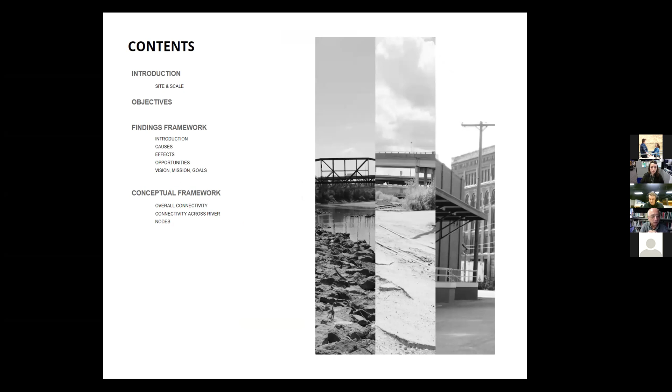For today, we'll start with a brief overview of our overall objectives for Studio and the different site scales we studied. Then we'll go through the main conclusions and findings about our area. Lastly, the Studio will present our conceptual framework and master plan so far for our area of study.

Our area of focus this year is on reimagining the River Valley in the Kansas City area, specifically the area surrounding the Kansas River and Armourdale. Our Studio objectives for the project are to rethink the Kansas River as an integral part of the city identity.

To reconnect the city to the river as a repurposed and extended public realm, and lastly, to enhance the connection between the two cities of Kansas City, Kansas and Kansas City, Missouri, using the river as a catalyst.

Our process for this objective has been through research and analysis, where we conducted an inventory of our site, focused on several conditions of the site, and began to form our conclusions about the area and some possible design solutions. From there, we needed to outline a conceptual framework for the project based on these findings, which resulted in a conceptual master planning framework and its integral parts.

We started by defining the scales that were most important for us to work within, which would give us various scopes of information.

The first scale we look at is the riverfront scale map, and this allowed us to look at all the neighborhoods along the Kansas River, including Armourdale, and determine more about the overall area and how it is used.

Then we moved into our bluff to bluff scale so that we can acknowledge the importance of the River Valley region and understand what topographical challenges we are dealing with.

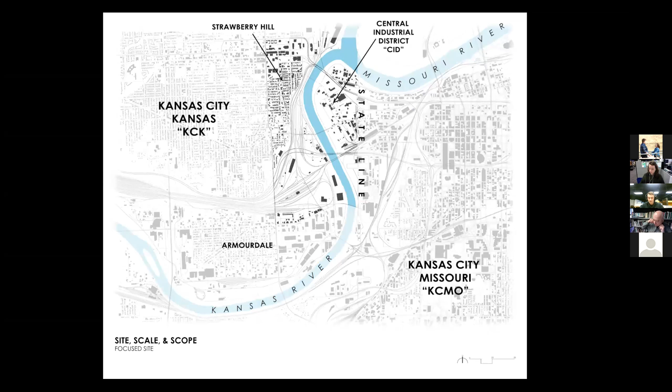And lastly, we have our focus site, mainly looking at the central industrial district as well as the context across the river.

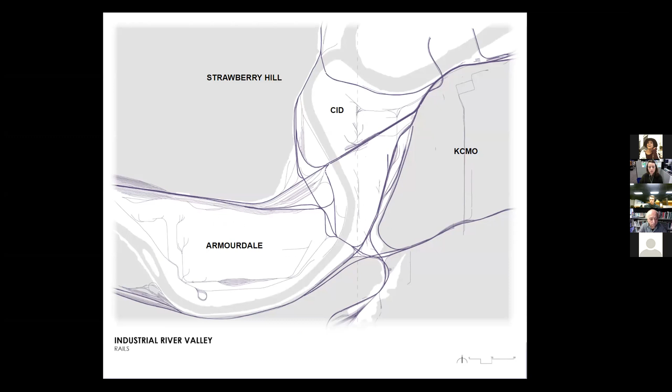The next major cause of the disconnection is the rails and infrastructure. Because of the topography of the area, as well as the river, the flat river valley allowed for implementation of heavy rails and infrastructure, which then over time developed up onto the bluffs as well.

As a result of both the river and infrastructure, the area became industrial in nature. These are all the parcels that are industrial, so pretty much everything surrounding the river.

After looking at these causes, we define the most prominent effects as being elevational division, there being three identities, disconnected and lack of public realm, as well as ecological impact. When looking at these three areas, there's no cohesive fabric to the cities due to history, geology, as well as use.

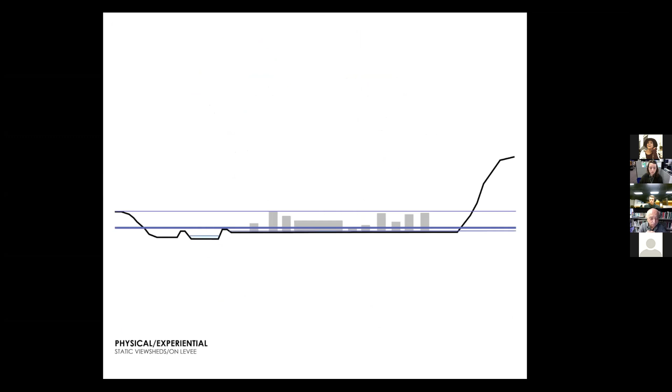In breaking down the first effect, we noted a site experience and elevational division. Because of changing topography throughout the area, the site is experienced in different strata. We began to study these strata and found there were four main layers: in the river, on the levee, on the ground, and then on the bluff.

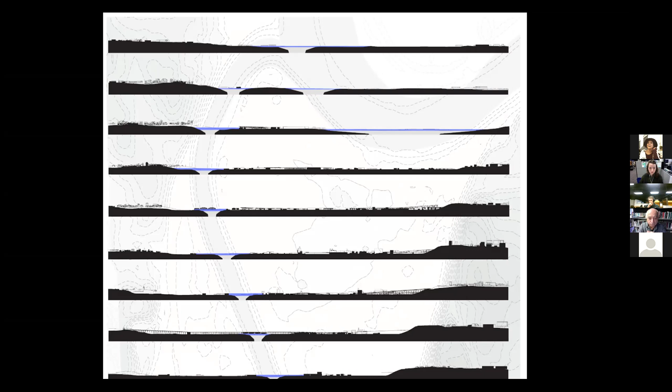We studied the qualities of these layers in plan figure ground and in site section, in relation to disconnected streets, significant spaces, and what you could not see for access from each point. We did this process for each of the four vertical strata lines across the site.

When analyzing dynamic view sheds as you move through the site, we found that objects were more vertical in nature, like billboards and buildings above 2 stories. We also highlight what was appearing in the view along the road most as you drive through. This particular study of Central Ave was just one example.

We did this process for multiple major streets within the site. Ultimately, it showed us that a design must address the infrastructure on our site differently than on the ground level, since it's experienced on a different plane.

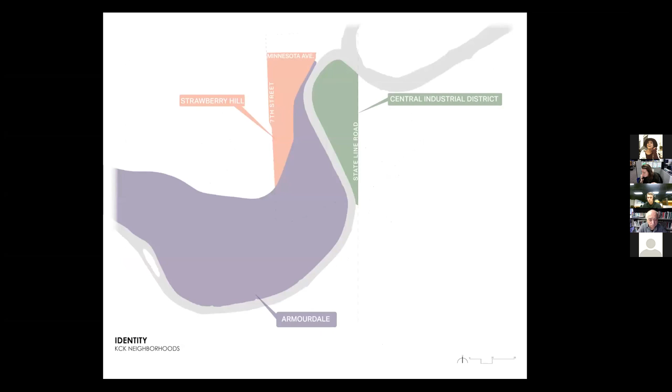The next effect was the city being divided into 3 parts. Here's the breakdown of those 3 areas, and they all have their own sort of identity, which is more clearly broken out on the next slide.

Strawberry Hill is pedestrian scale residential with a regular street grid. CID is spread out industrial buildings at a larger scale with tall infrastructure running over the area. Armourdale is a hybrid of the two.

The organization of the street grid with zoning also affects the east and west connection, with the most walkable connections being in the north and south orientation there in Strawberry Hill and Armourdale.

And the third effect we defined was the river disconnection and lack of public realm. We identified that the public realm has little to no connection to the river, with only 2 public access points and much sparser open green space than the surrounding areas.

And then the last major effects were the ecological impacts. So for one, we're dealing with heavy industrial use, which has created large areas of contaminated land called brownfields. Here's an overview of all the dominant contaminants, which are VOCs, heavy metals, PCBs, and oil.

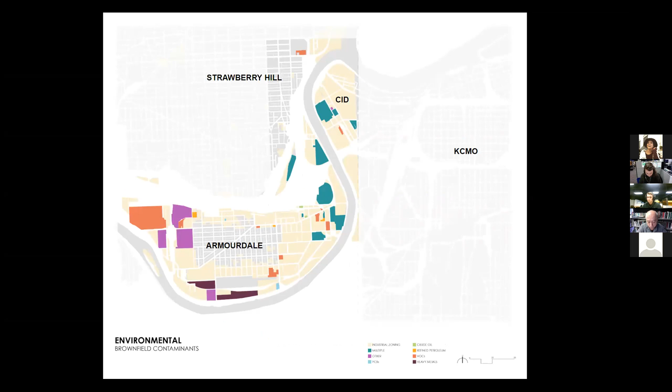And next, we assumed smells and analyzed establishments around the site, breaking them into categories based off potential smells, things like coffee, restaurants, water treatment, newly cut grass, manufacturer, supplier fumes, and highly dusty smells.

And due to the nature of the site in the heavy industrial area, it was important to analyze air pollution in KCK and CID. According to the EPA, particulate matter impacts the site primarily, which is most likely due to those industries around. And then due to the high traffic volumes, both on the streets and the highways, fumes from vehicles, trucks, and trailers produce high amounts of diesel particulate matter that also impact the surrounding neighborhoods.

And overall, air pollution in KCK, Armourdale, and CID was noted by the EPA that the pollutants in these areas do in fact have an impact on the health and wellness of the public. And those closer to these industrial parks are more at risk for cancer.

Also, the EPA listed the following impairments for our section of the river: high levels of E. coli, murky water, high levels of phosphorus, and degraded aquatic life. And these impacts are largely a result of upstream activities, including sewage overflows, sand and gravel mining, and agricultural runoff.

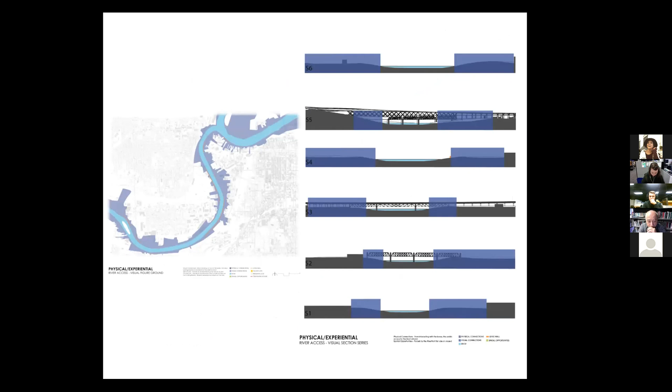And next, this slide shows the visual figure ground of the site, and when you're standing on the levee, what you can see and then what is blocked. And the next one starts to talk about the physical space that is open and not impeded by anything, and you can actually walk on.

And then, as we mentioned in the beginning of the presentation, our site does sit within a floodplain. So the levees that have been created to protect the surrounding communities also create challenges in accessing the water.

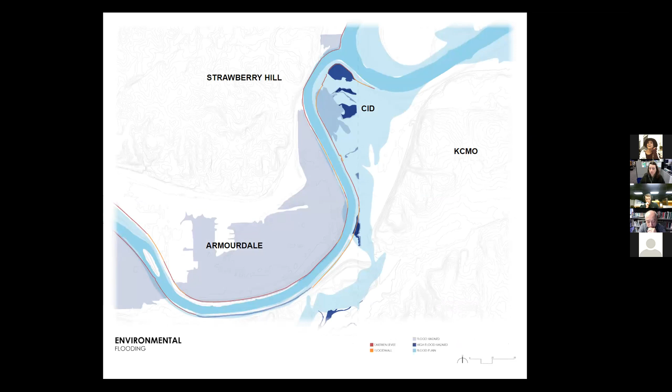And here we just went into a further analysis of the river so that we could see what the challenges are then to creating a more public realm here. And we did pair the hydrograph to compare and show just how quickly that water level can change depending on the day and the season.

And then another finding supporting the potential in this area is that the flow of the water in the Kansas River is better suited for recreation compared to the Missouri River, where it's much faster. As well as the potential in these sites of higher ecological value, which you can see a pretty good size bit there at the base of Armourdale.

Another opportunity we saw is that the site area can be grouped into nodes. So the first node that we classified we call Noodletown, and this area is defined by the immense amount of infrastructure that divides the space and the topographical shift onto that Strawberry Bluff Hill.

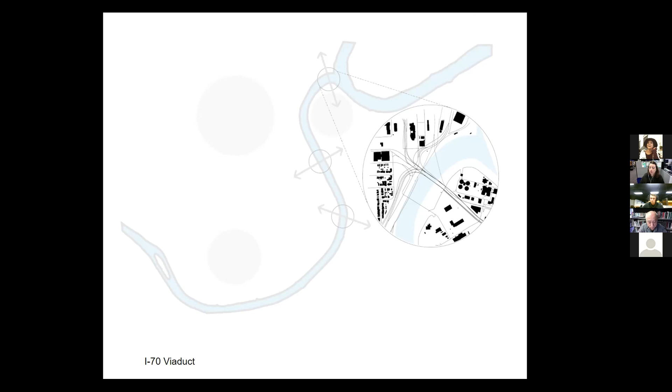As seen in this view shed, the main space defining feature is the I-70 viaduct. And the spatial organization study also starts to show how the streets and the off-ramps of the infrastructure start to create vertical barriers that divide the site.

There are also significant buildings and spaces in the I-70 viaduct and Strawberry Hill area that bring character to the site. These buildings are seen from dynamic moving views on the highway and can be used as wayfinding elements to bring people to this public realm.

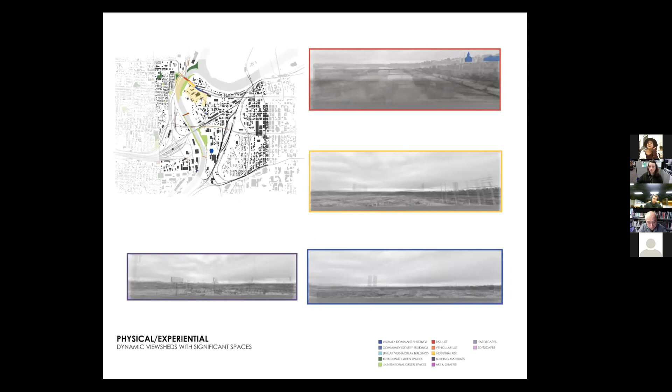For example, the grain silo seen up north by Kaw Point is a major one that shows a lot of the site's character. And when you're looking south on I-70, you start to see the significant historic buildings up in Strawberry Hill that can also act as opportunities to draw people in and be used as a wayfinding point. The next node is located in the CID area.

This area is defined by the rail yards that surround it and act as barriers of entry. The river and the levee divide this node into two spaces on both sides of the river, and the infrastructure that goes over the space further divides it.

When looking at these dynamic views for this area, there isn't a major focal significant space that would draw people to this node when driving over it, but there are other opportunities to develop some sort of draw that would give people a reason to go to this space.

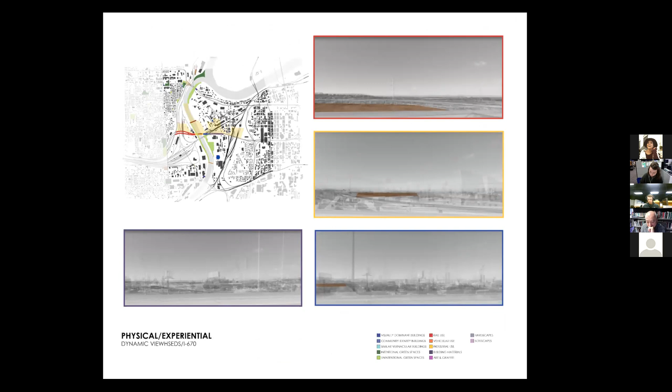Another big aspect of this node is the Central Ave Bridge underpass. This space is very popular for locals in the area and has a significant car community population. So we see this as a big opportunity to use as a connector between the two sides of the river. And this is just another view shed of that underpass.

The third node is the most public-oriented zone of our site, but it's still significantly disconnected from the river. The node boundaries are still defined by rail yards and infrastructure, but the one major difference is that there's not the significant infrastructural divide across this area like the others, which is why it has been the easiest to start developing.

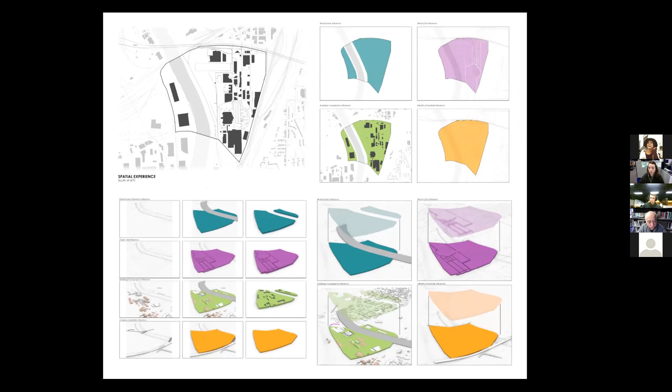There are already major eye grabbers in this area as well, like Hy-Vee Arena and Rock Island Bridge. Using these as a way to draw people to that future riverfront public realm is a significant opportunity.

Upon further analysis of the social and cultural life, we discovered that Strawberry Hill is a very active neighborhood with plenty of informal and formal public spaces. For CID, it might be heavy industrial, but the communities there really do make use of alleys, streets, parking lots, and under infrastructure.

Unlike CID and Strawberry Hill, Armourdale lacks a stronger social and cultural life.

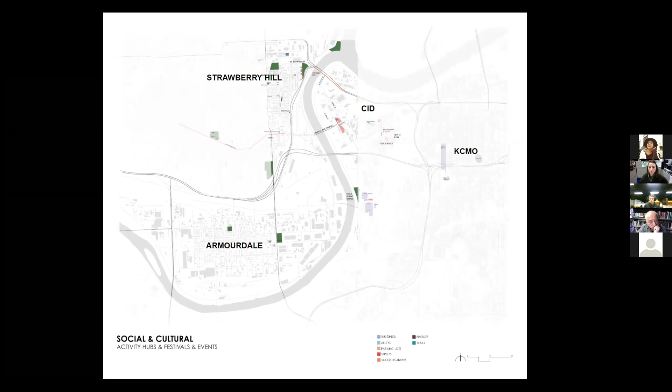We then created a network of these established festival and event locations to see how they connect with each other. They are mainly clustered along 7th Street, with most of these locations in the Strawberry Hill area.

For health conditions, they are a concern in the community, with the most prevalent being obesity and mental health. These conditions affect people across race and age, suggesting a large benefit from designs that promote physical fitness, nature, and social interaction.

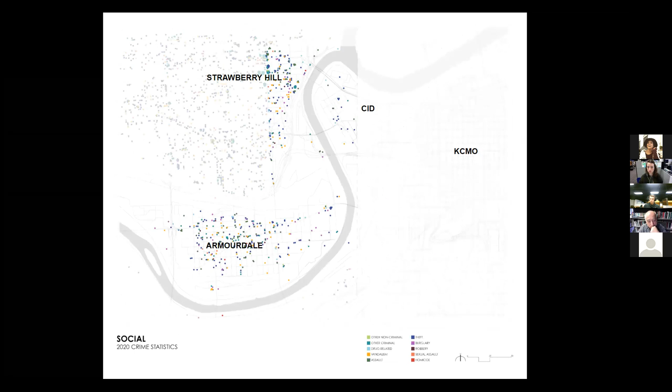The main ecological issues with the site are water pollution, heat exposure, brownfields, and soil contamination. The ecological potential looks at opportunities to reduce the impacts of these effects through green infrastructure projects and reforestation.

Because our site resides in this river valley region between the two bluffs, surface water from both bluffs is funneled down to the lowest areas on our site. This allows some areas of the site to be more susceptible to flooding when there's heavy rainfall.

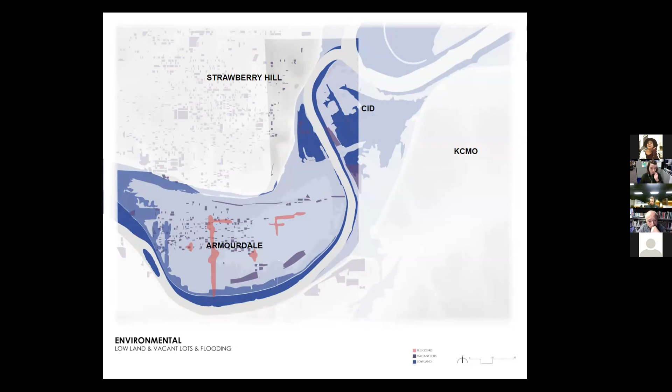When identifying the vacant lots in the area, there is potential for water retention systems in some of those low-lying areas. There are also some spots in Armourdale that have been deemed problematic for flooding and pose an opportunity for further investigation.

Adding more tree cover to the area would help not only with noise pollution, but also the heat island effect. And then I'll pass it off.

For the vision statement, we seek to create an improved urban setting that reconnects the city to its geography and establishes the industrial Kansas River as the defining element that reorganizes and strengthens the identity of that city. Next, the mission of this project is to reevaluate the land use of the Kansas River Valley in order to reconnect people to the river, promote community engagement, and enhance the image of the city.

We seek to reappropriate the balance between industrial areas and the public realm, enrich the ecological environment, and form a synergistic relationship between existing industry and the public spaces that fosters a pattern of shared use along the river.

Lastly, our goals, being the most specific elements of this framework, have been broken down into 3 categories: public realm, industrial, and environmental. Our public realm goals are to improve and expand public spaces and pedestrian movement in the site, and create new amenities that are safe, inviting, inclusive, and meaningful.

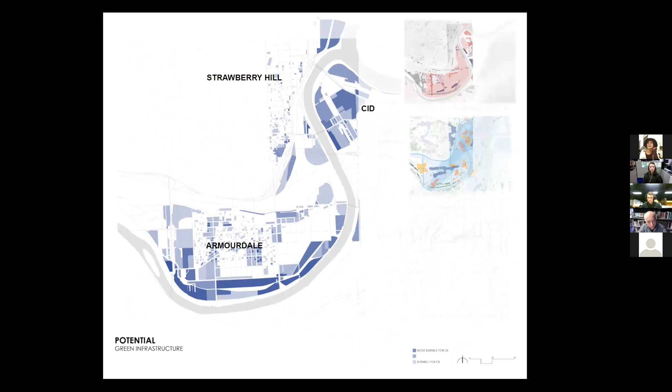These maps, overlaid on each other, would give us background information to create a map showing parcels that were most suitable for green infrastructure. Then we compared dead-end streets, vacant lots, green space, and informal public gathering spaces to get a better grasp on what parcels of land would be best for public realm, using the same process.

We then compiled all these layers to understand what parcels in our scope would be most suitable for either green infrastructure or public realm. This process involved looking at each parcel in the study area and determining how many factors from the previous maps began to affect it. The more that affected the parcel, the more potential it had.

The last step was to overlay both maps, green infrastructure and public realm, to determine what parcels were beginning to have high potential in both realms. This process was used moving forward as we started to look at these parcels in exact areas that we wanted to study, starting with 7th Street.

The first phase of the concept is focused on connecting Strawberry Hill, KCK, to Armourdale along the already trafficked 7th Street. This phase of the concept is more in broad terms of where the studies show that interventions can happen along the street to make it more connected as a whole and increase travel between the 2 areas.

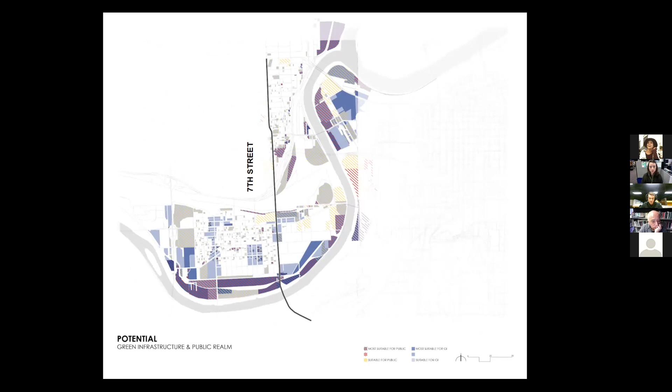The potential parcels were then narrowed down to what was pertaining to 7th Street along that stretch. This allowed us to see where stopping points, or places with high potential of intervention, began to form with these clusters of potential parcels.

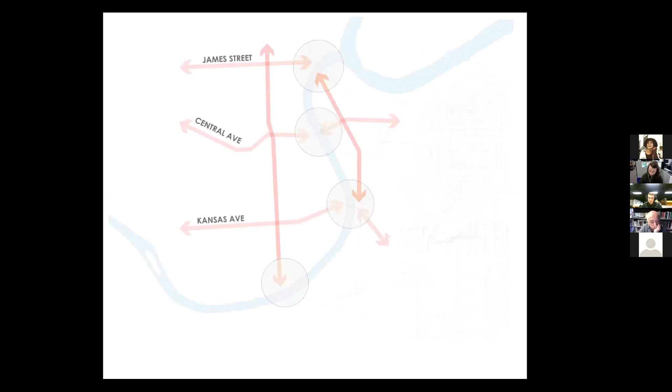From here, we move into connections, focusing on how the concept can unify the currently disconnected 3 cities that we've seen and connect into the larger areas of KCK and KCMO as a whole. This is important since it is a vital factor in making our main idea of a river-centered city work.

We want to create a connected loop that brings people between the 3 areas and most importantly to the river. This process started by demarcating our boundaries for the loop and creating a hierarchy of streets we wanted to examine. First, for the east and west borders, 7th Street and James Street were chosen since they connected all the way down through the city in each area. These serve as the major routes.

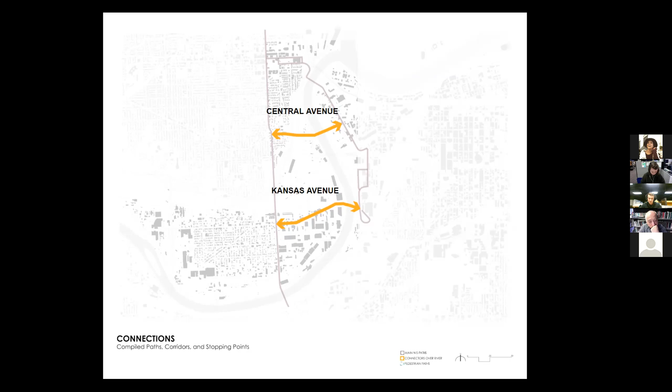Next, the two connectors of Central Ave and Kansas Ave are the only streets that cross the river in between the boundary. They are also heavily used on the Kansas side for retail and restaurant locations, which makes them prime to connect down to the river and the bottoms.

Lastly, we identified the major streets that tied into the loops from the outside areas of KCK and KCMO. These identify where major points might land along our loop that would make sense to develop or study.

Then we use the same process as before, utilizing our green infrastructure and public realm maps to get an idea of where clusters of parcels or areas of opportunity started to arise. This understanding of where many of these parcels lay, along with our previous study of 7th Street, led to a series of stopping points and developable corridors along this loop.

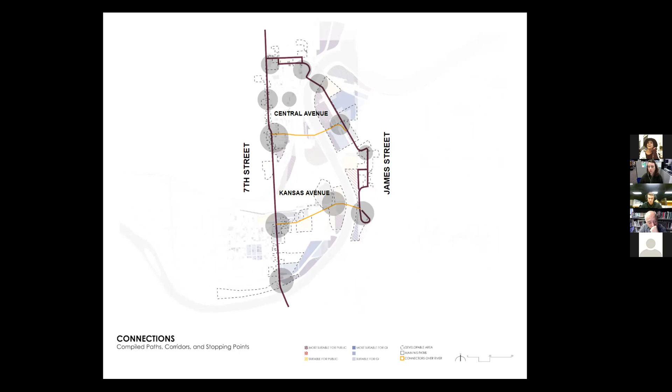First, the stopping points were formed where there was a cluster of potential parcels on our map and also a connection to important pieces of the area like Crossroads or the River Market.

Next, a system of developable corridors was made by outlining those green infrastructure and public realm points, along with further research into what areas along the path were lowest density or where large parking lots occurred. This gave us a blueprint for most developable land.

As a system, this piece of the concept serves to strategically find what areas of the site are best used for intervention and how they tie together into a cohesive whole with the river at the center focus.

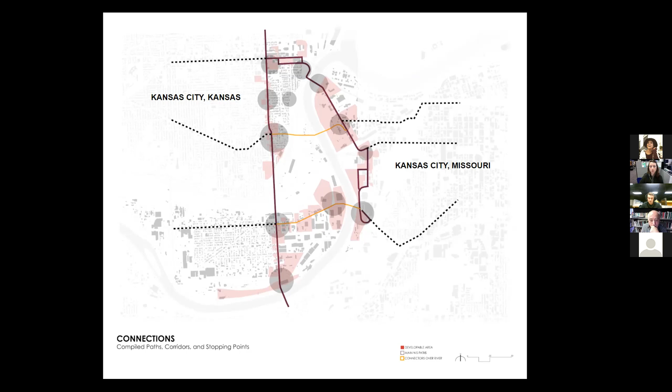This research also allowed us to see that on the bluff edge of Strawberry Hill, a pedestrian loop could eventually be created that tied these corridors and stopping points together and also took advantage of the dead-end roads that stopped at the edge of the bluff. This piece could begin to tie into a river stretch area further on as well, creating pedestrian linkage from bluff to the river.

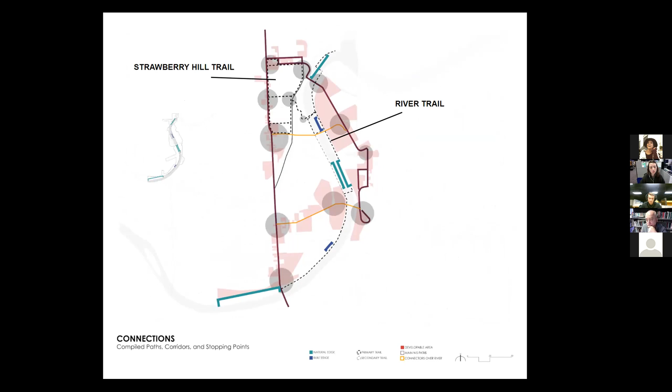So for the conclusions of this first piece of the concept, it was the area needed connection due to its currently disconnected state. And this proposed connection seeks to tie the three areas together in a unified whole that brings public realm to the center of the river.

And lastly, this piece of the concept also serves to outline areas for green infrastructure, public realm, and development opportunity in the future.

From here, we move back into our first diagram to talk about the most important piece of the concept, which is the river area. This part of the overall connectivity uses the river as an axis to connect through the site from Armourdale to Kaw Point.

Before beginning, we started by compiling some of the background research we had done for the river regarding water flow speeds, structures on the river, levee wall conditions, and sewage outfalls. We also studied water heights and where in the river was more shallow versus what was deeper.

It was also important to note what was flood wall versus what was an earthen levee along this stretch. And where there was an earthen levee, we needed to know max and minimum heights as well as these fluctuations we've seen.

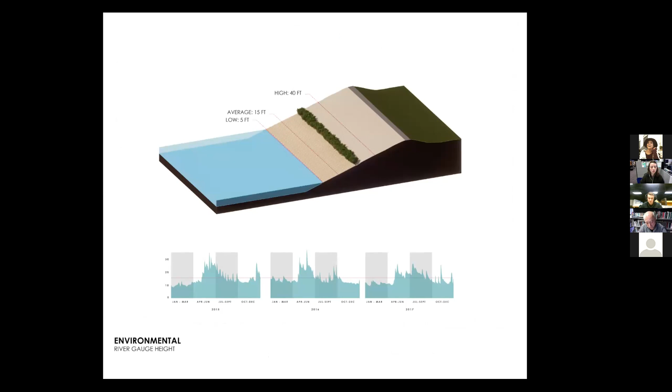From here, we identified the most reasonable start and end points of the river stretch we wanted to study, which were located at Kaw Point and at the end of 7th Street in Armourdale.

We also wanted to understand what the space was like along the river visually and physically. Where did we have more room to work before buildings happened versus where it was mostly untouchable?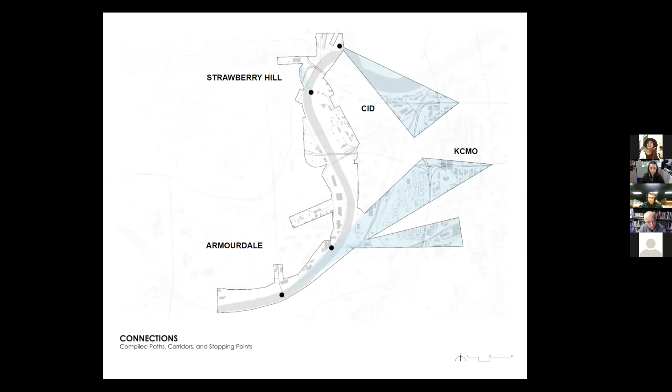As we began to narrow down more and more about our stretch along the river, we started to mark out where major viewsheds were happening, as these could serve to become spots where a river interaction point or development could occur.

Next, we overlaid ecological factors onto our stretch to understand that there are several points in the river with more priority for reforestation and tree coverage potential. This also takes into account heat island effects we had researched earlier.

Another ecological issue along the river was the outfalls. These areas were marked to give us an idea of where we needed to take steps to circumvent those areas as we created our path along the river.

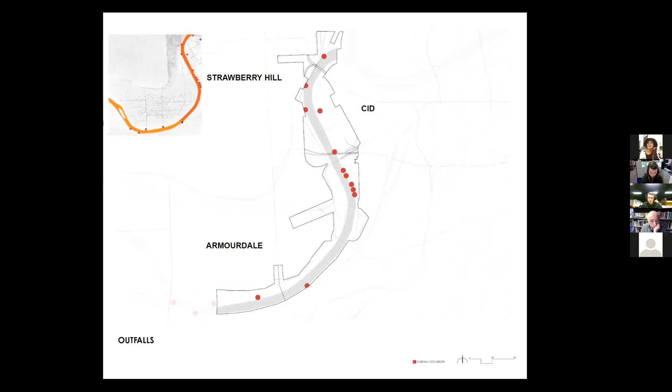Lastly, we overlaid our green infrastructure and public realm parcels to understand where these larger areas of potential parcels were lying, as well as which were mainly in the Kaw Point area, Central Ave, at Rock Island Bridge, and down by 7th Street in Armourdale.

With all these previous factors in mind, a system of hard edge, soft edge, natural edge, and river interaction points began to develop. At a hard edge, we envisioned some type of built edge down to the river. At soft, it would be more of green infrastructure or natural trail. At natural, it would be mostly untouched. And at river interaction points, we envision a major stopping point or development along the path.

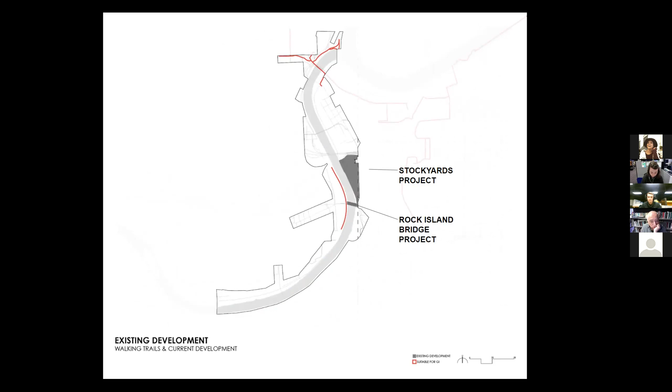This was paired with existing walking and bike trails, along with new development at Rock Island Bridge and the stockyards. This led us into a system of where a new trail could begin to develop and where it tied into those existing trails and paths.

Overlaid on top of each other, you begin to see how the system takes advantage of these issues and opportunities along the river stretch.

As we move into more development of this river stretch plan, we began to organize how the different points along the river were meeting and interacting with the water. This is based on a system of built edges and natural edges that each spawn from specific needs in that location, where there is not room for a large trail on top of the levee due to rail or industry.

An elevated trail could be used. This path could be at a height above the max flooding, or reside closer to the water and become a temporary means of access depending on flood levels.

In terms of a more natural edge, a green infrastructure edge is a means of getting down to the river in a more organic way and could combat flooding in that area as well.

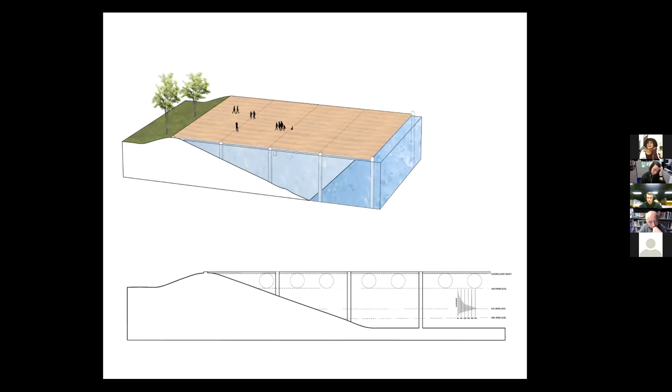For areas that a large amount of people wanted to access the river, we used an accordion deck edge. This was derived from a precedent and is a river interaction that rises and falls depending on the water height. When the water is low, the deck could utilize these vertical areas in between each level for a variety of options that can be explored further on.

Where there's a levee wall, a system of ramps that trace up and down the wall, allowing views and access across in a playful way, could bridge a previously heavy barrier to interact with the public and also bridge the gap to the river's edge.

And lastly, development could be imagined over this wall in a way that bridges the river access gap and also creates a unique riverside development area in that spot.

In the final part of the river stretch study, we went more into detail to propose where public realm versus development made the most sense and how these interventions interacted with the pedestrian realm along the river.

This resulted in a system of river interaction points, public realm, future development, and pedestrian linkage that serves to unify the river stretch as a whole and link these areas that differ in character and purpose.

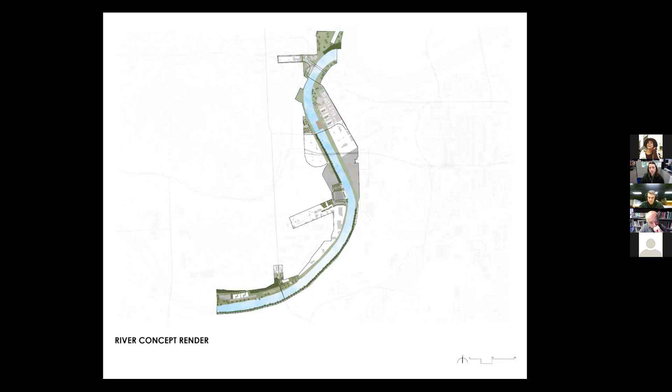From here, the studio was able to divide these portions of the river into nodes that could be explored further into how each one worked on its scale and interacted with the overall concept area. Each of these areas has a specific goal that arises from its character, as well as what purpose it can serve to unify the river as a whole.

To conclude some of this river stretch concept, we included one of the precedents we've been studying at Crescent Park, noting its design strategies on how it was dealing with some of these levee walls and linkages across this river edge with industry.

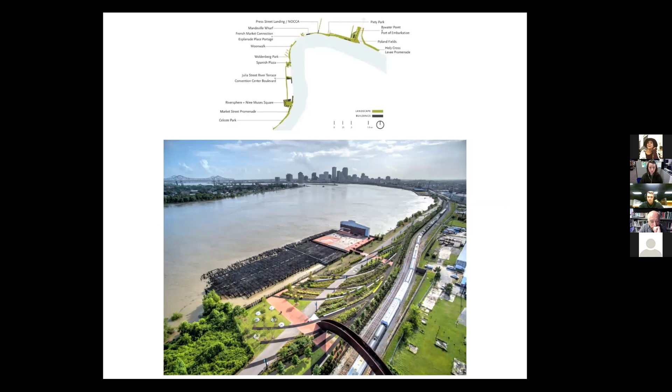If you go to the next slide, you can kind of see this green infrastructure park that is designed to be flooded since it's in front of the levee wall, but when it's not flooded, it provides this pedestrian public realm to the river's edge.

And that kind of wraps up our river concept section.

So to make our final conclusions, the river concept seeks to create a continuous public realm that connects Kaw Point to the end of 7th Street in Armourdale. This concept also serves to connect the surrounding city to the river and serve as a catalyst for future development. Lastly, the vision and concept as a whole serve to unify the Kansas River area, bring access and connection to the river from the 3 adjacent neighborhoods, and better connect to the larger areas of Kansas City, Kansas, and Kansas City, Missouri. This brings us to the end of our first section, if anybody has any questions or discussion.

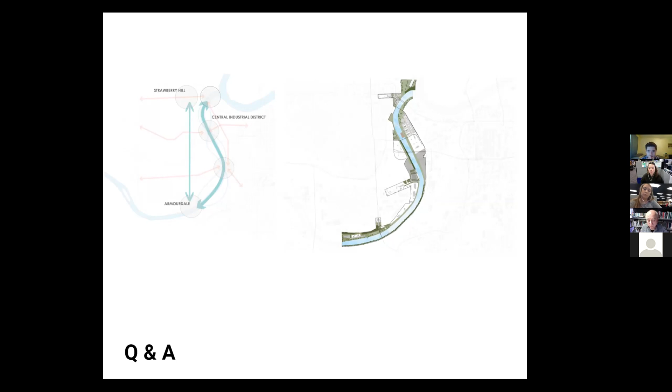So Taylor, if there are any other comments, maybe you can take on and talk about it. Yeah, of course. So my name is Taylor Slusher, and I'll be taking you through the I-70 and Central Industrial District node.

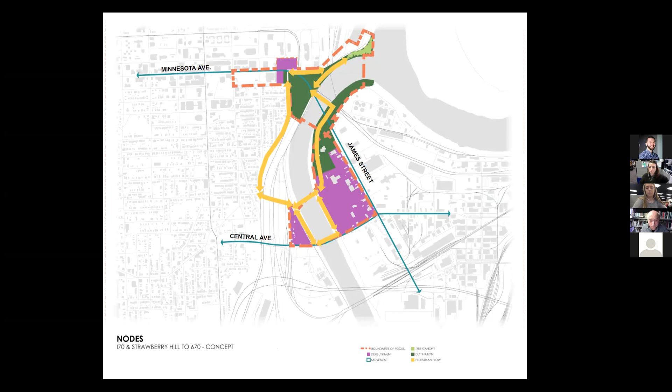This second map is more of an overarching concept, with the main focus being those yellow arrows and how the pedestrian flow in this region is intended. Secondary to that is how traffic and movement flows in and out of this region. In our axon diagram of this concept, you can better understand these called-out spaces and what exactly we're trying to connect, and how that green highlighted neighborhood, Strawberry Hill, would directly benefit from all these nearby considerations.

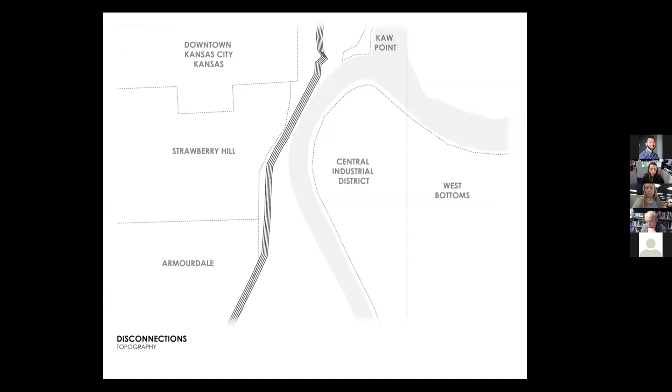Within these next process maps, this first one talks about the disconnections, which starts with the river, then the topography, which is the second major element of disconnect, followed by the interstates and highways, and then a significant railroad infrastructure, which leaves our site as three discrete islands that we will seek to connect through development of underutilized land and a pedestrian circulation network of new and existing trails and bridges.

Going into the I-70 node, to start, we broke down these areas into subregions, beginning at the northmost node, Kaw Point I-70. This slide summarizes the issues that impact this region, which include the disconnections, street traffic patterns, and deficiencies of urban typology. A key strategy to this concept is how to connect to Kaw Point.

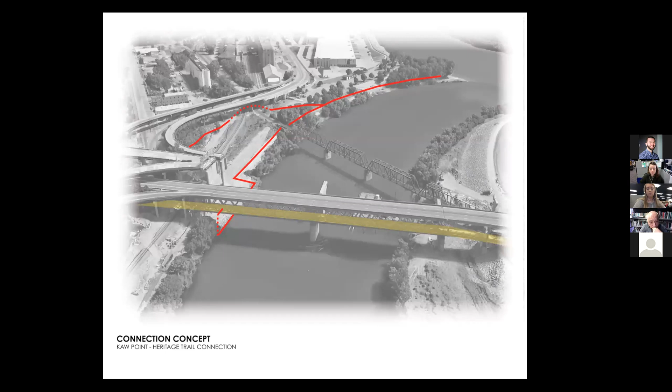This talks about Crescent Park in New Orleans, Louisiana, which is very similar in character to what we want to drive or achieve. The ability to bridge over and traverse down a significant grade change is similar in character to the challenges we face. Here's another image of that.

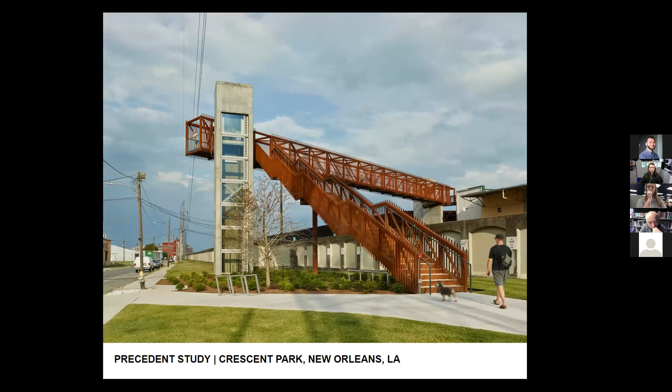Diving into the I-70 redevelopment plan, the I-70 stretch begins at that KCK entry point off of I-70. The vision for this plan is to create a gateway. There's one large parking structure, an open parking lot, and an empty lot that could help define the edge.

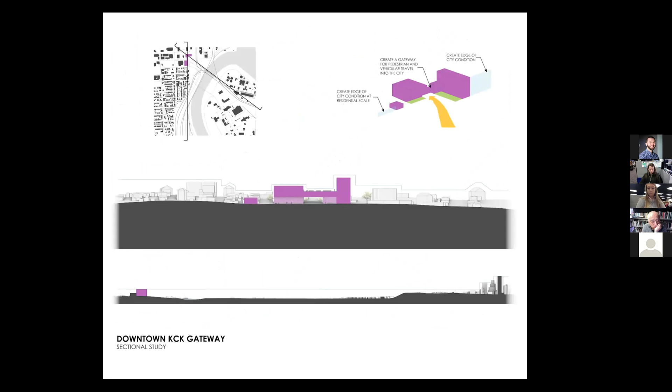The proposed development welcomes traffic off I-70 and even those driving by on James Street. This promotes a strong urban edge and completes the city's boundary. In section, the building masses connect via a circulation structure, emulating the idea of a gateway presence, welcoming those coming into Strawberry Hill. Lastly, the development height within the bottom section showcases the feasibility of the building height to regain a strong city skyline.

Moving down to the I-70 infrastructure space, this area focuses on the integrated river heritage trail and analyzing nearby green spaces, attempting to bridge the gap of nearby disconnections.

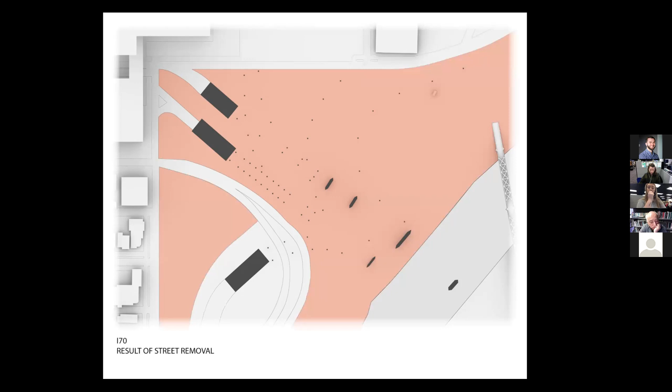This first major disconnection is the street grid running through the underside of the I-70 underpass. The current layout of vehicular circulation prohibits the ability of the underpass space to connect with nearby spaces. However, by proposing to remove James Street, the space opens up towards Kaw Point and, most importantly, the river.

Taking a step back, the highlighted massing showcased here is the restricted space in relationship to the river and Kaw Point to the east. However, the space greatly increases in massing once part of James Street is removed, allowing the connection of Kaw Point, the river, and surrounding spaces to be made.

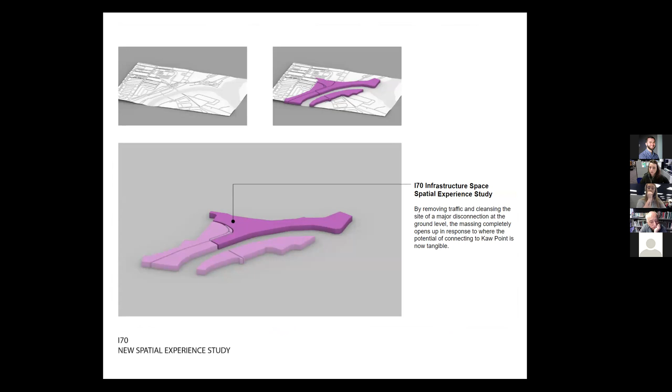From there, the above-ground topography is created. The character is very complex, with a dramatic slope and topography at both levels. Further analyzing this space, typologies are created based on their infrastructure and ground-level characteristics, called immediate, layered, and in-between spatial levels.

Within the last section, the spatial composition is linear in character and supplies a low ceiling to these outdoor rooms. Most importantly, this space creates an enclosed volume similar in character to an indoor room, with similar qualities to that of having walls, floors, and ceilings. Lastly, the overall topography of the above level is flat and consistent, which in character is completely opposite of the other sectional quality.

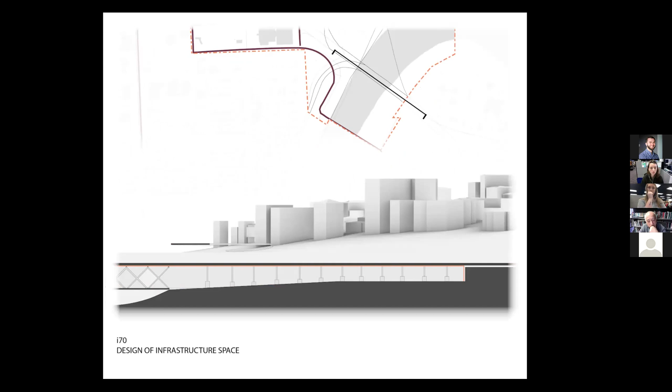Finally, the proposed design focuses on the most important spaces of the site, with the linear spatial composition running under I-70 as a gathering and event-like space. Then within the in-between area of the site where the topologies are inconsistent above ground, others form dynamic space that includes an amphitheater, outdoor plaza, and an overall flexible space that can be used for many different functions.

The overall space acts as a green infrastructure development, attempting to solve issues with the slope and potential rainwater runoff. By doing this, the potential for the space could act as a cooling zone within the summer months.

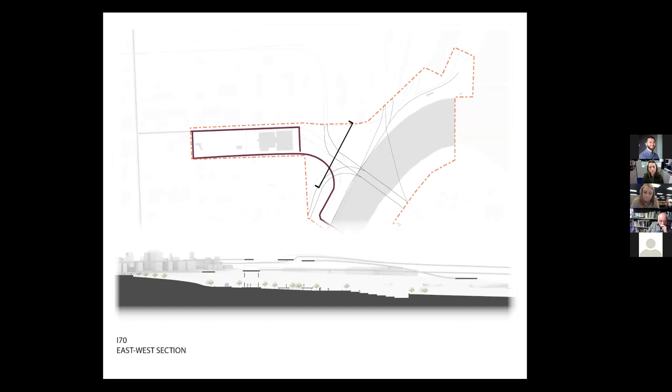Overall, the ability to reconnect the spaces along the river, Kaw Point, and further into Strawberry Hill serves as a primary ambition for the studio group. Within a series of raised trails, outdoor plaza space, and multiple spaces functioning as event, gathering, and community involvement areas, the space gives the community an outdoor public room, continuing up to St. John's Park and beginning to make connections with nearby spaces.

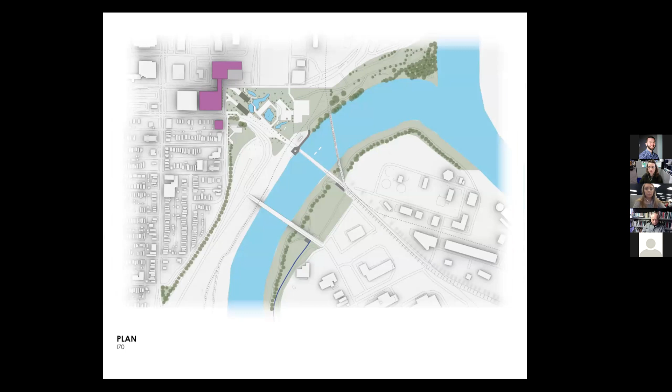This overall composition of the space attempts to work with the slope, providing community space that brings them down the slope through a designed public realm. Overall, this is the composition of how we are attempting to connect to Kaw Point, to Strawberry Hill, and then over and across the river to the green spaces alike.

Within this northern section, towards the Central Industrial District, the focus is on that river stretch area. Some of the biggest issues we are dealing with in the CID area include an extremely large brownfield on the east side, levee flood walls as a physical barrier, and then on the west side, a vast area of rails, highway, and steep topography.

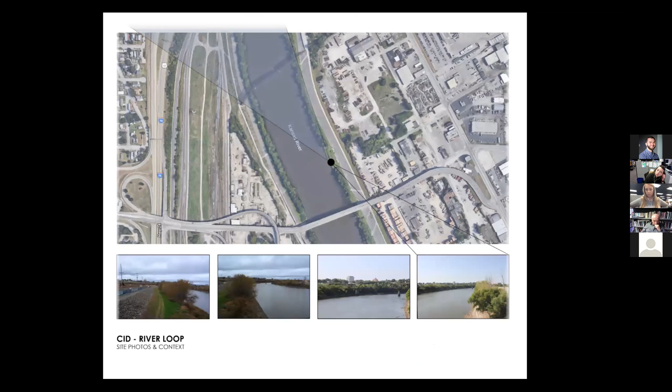Within the site photo sequence, the first image provides a glimpse of the levee system. The second photo reveals the current state of the river. Next, an abandoned bridge is within view of the CID site. And lastly, the east side of the riverbank is revealed in its current state.

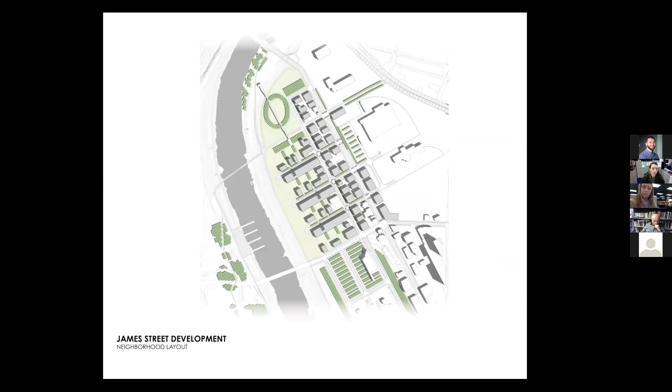A major issue to this proposed pedestrian access is the current existence of an immediate brownfield to the east. To address this, we looked at a reference of a past year's project for a 5 to 20-year plan of remediation, and how development could proceed on top of those zones once remediation is complete. This plan shows the previous studio's development of the remediation and how that could look, then the potential development increasing density to multifamily housing and commercial strips. This is definitely something we will take from and expand in our future design strategies.

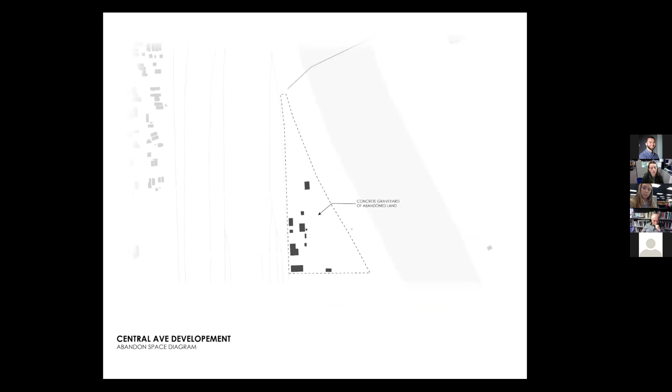Moving to the west side development, another context area that was important for us to start developing was the underside of the Central Avenue Viaduct. As seen in the pictures, it is what we call a concrete graveyard, abandoned and leftover industrial use. This site starts to have potential for access to the river, and it can help complement the river loop we are trying to develop.

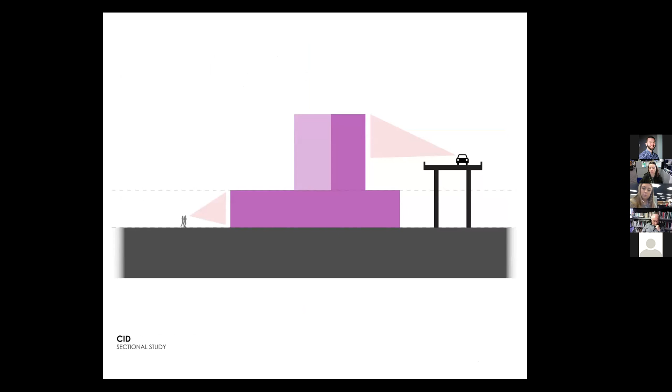Moving to the Strawberry Hill River connection, another important aspect we looked at was how we could connect Strawberry Hill to the river. Most importantly, how this closes the river loop and completes the pedestrian experience along the river.

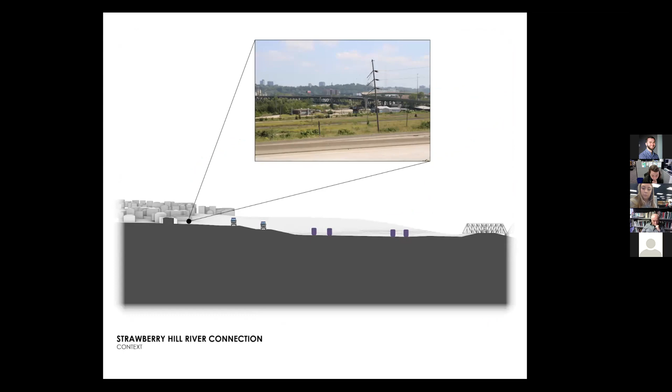We looked at the space between Strawberry Hill and the bridge in section to understand the area. This one shows a picture of the highways and rail that separate the under Central Ave area from Strawberry Hill, and this one shows the aspect from the under Central Avenue area.

The idea for this connection is a pedestrian bridge walkway that takes you over the rail and infrastructure to the landing point on Strawberry Hill. The landing point by the abandoned bridge would be infilled to match the levee height for access straight down to the river off this landing. The pedestrian bridge has stopping points, built-up landings in between, where the rail and highways would allow it.

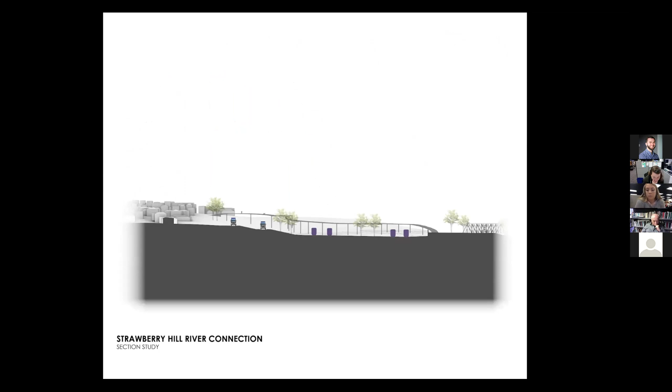And that is all for the I-70 to Central Industrial District Group.

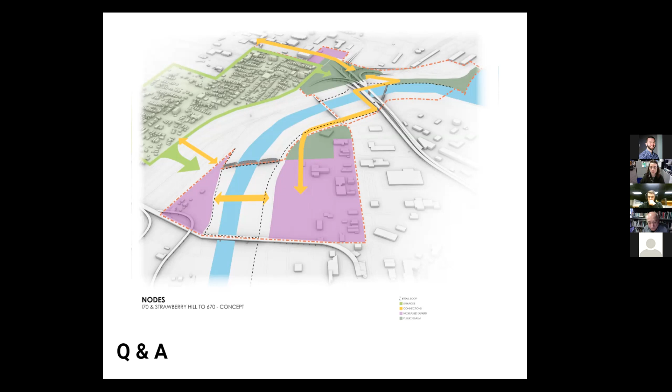I think that works. I've already spoken a bit, but I'll introduce myself. My name is Michaela Lindeman, a fifth-year architecture student from Kansas State University. I'm going to walk us through the next sections of the site where we began developing conceptual designs and overarching strategies, within the Armourdale neighborhood at the intersections of the river and Kansas Avenue and 7th Street.

There are some key concerns we want to reiterate: crime statistics, health conditions, activity centers, and bus routes. There are known gangs in the Armourdale area and the possibility of more forming. The community does not feel safe. Physical activity and social engagement are important to incorporate, as obesity and mental health concerns affect a majority of the population. Lastly, there are few activity centers in Armourdale, and the bus lines don't reach all zones of this neighborhood.

Beginning with the basic conceptual zones at the node level, we foresee increased density within each of the two areas, as well as public realm opportunities that interact with the river. Each node interacts with surrounding linkages and creates a relationship with existing conditions, seeking to benefit the community and connect them with the river.

Looking deeper into the intentions of the space, Kansas Avenue and 7th Street are proposed as green streets with greater density that promote walkability, address green infrastructure needs, and move users to intended destination areas along the riverfront. The triangle created by these two corridors and the Kansas River confines this industrial district so as not to encroach on new development and residential areas.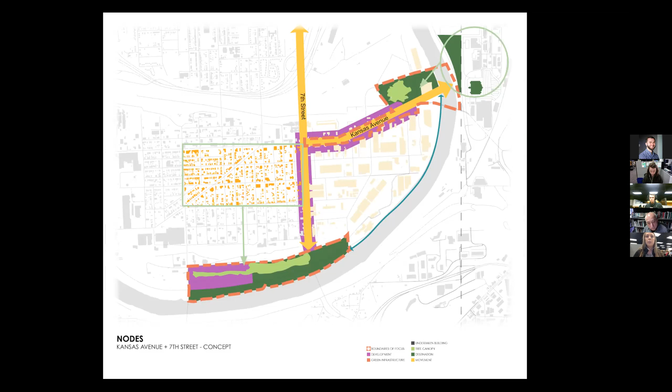Finally, we identified issues in the Armourdale neighborhood and relevant surroundings that influence design strategies and phasing, such as the active brownfield north of Kansas Avenue, the flood hazard at the intersection of Kansas Avenue and 7th Street, the lack of access to the riverfront from 7th Street, and the outfalls, which are currently very prominent on the site.

So we begin looking at the conditions and design strategies for the Kansas Avenue node. The land along Kansas Avenue near the river is primarily used for commercial and industrial purposes with no current area for public use or recreation. Zooming into our focused area, the parcel highlighted in red is currently owned by a dog treat factory called KC Treats, and it's an active brownfield with multiple contaminants in the soil.

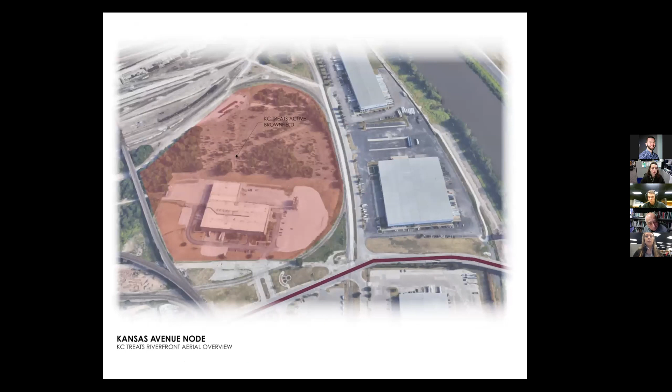This area is composed of mostly vacant land with a few oversized and underutilized parking lots situated around the warehouse buildings. In this east to west section showing current site conditions, you can clearly see the amount of vacant land present in the area. On the western bank, the right side of the section, the river is almost entirely ignored and underutilized.

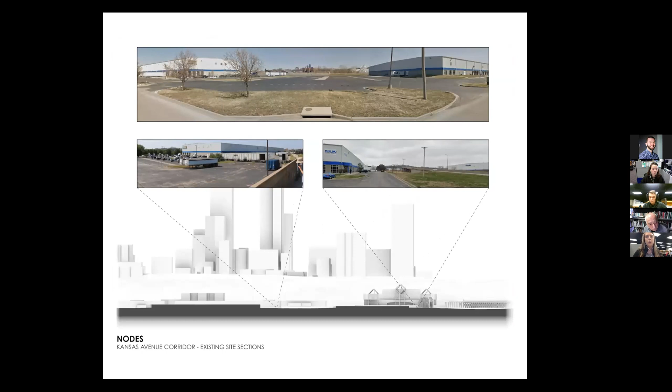In this north to south section along the western bank of the river, two industrial warehouses occupy prime real estate with a large and mostly unused parking lot in between them. This diagram shows the large amount of both recent and proposed development in the area along the river. The recently renovated Hy-Vee Arena functions as an indoor youth sports facility with an 8,500 person capacity.

The Yards, a large apartment complex designed by Kim Studio, opened this year with plans to build a second set of apartment buildings called the Yards 2 near the riverfront.

The area highlighted in yellow is part of the Riverfront Master Plan with a proposed set of mixed-use buildings and riverfront revitalization. The Rock Island Bridge, highlighted in orange, will soon be developed into a major pedestrian space with recreational functions like seating, public restrooms, and a bar.

The areas highlighted in green are the spaces where our studio proposes adding public space, connections to the river, and forest preservation to help improve environmental issues in the area and complement the many new development projects. This is the overall master plan along Kansas Avenue, with proposed public spaces, mixed-use development, and greenery. First we'll look at the riverfront area near the Rock Island Bridge.

In this area, we're proposing a large section of terraced public plazas that bring people right up to the water's edge and connect to the levee trail, along with a new parking lot near the KC Treats building.

In the top right, you can see the proposed outdoor floating stage on the river, along with the terrace stairs and ramp, or 'stramp,' that is part of the riverfront master plan.

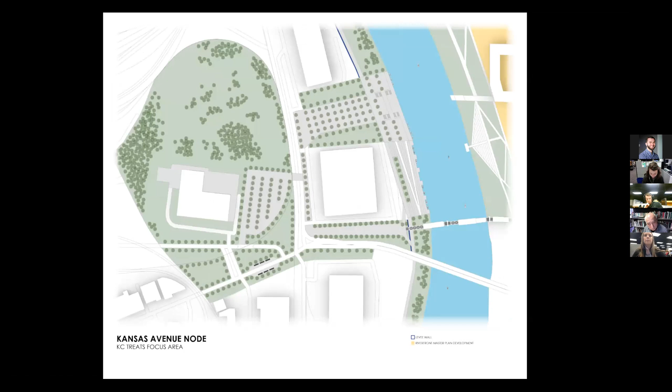Here's another view of what the terraced riverfront might look like. The indentations on the left part of the terrace are boat slips for people to park their boats, and the local rowing club could also use this area to launch their boats.

Next, we'll look at our brownfield remediation, or cleanup plan, for the KC Treats parcel. In phase 1, we examine the current conditions of the area. The ground on this site is contaminated with multiple heavy metals and VOCs that need to be removed from the soil. In phase 2, we suggest a few different ways to extract the contaminants over a 15-year time frame.

One extraction method is called phytoremediation, planting certain species of plants and trees that can remove and contain the contaminants. We also mention a few other methods, including using chemicals to extract the contaminants, removing the topsoil, and extracting the VOCs via drilling.

These are just a few suggested ways to clean up the site, and ultimately a lot of testing will need to be done to figure out which methods would work best for the area.

Lastly, we suggest letting the site grow naturally and become a forested area over the span of several decades. Having a lot of trees on the site will help improve many current issues in the area, such as heat island effect, noise pollution, bad smells, and air pollution.

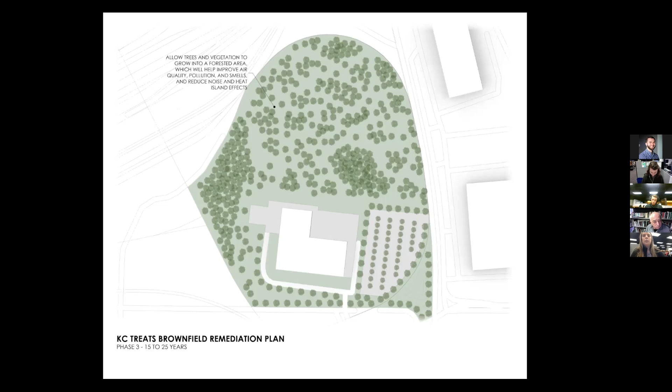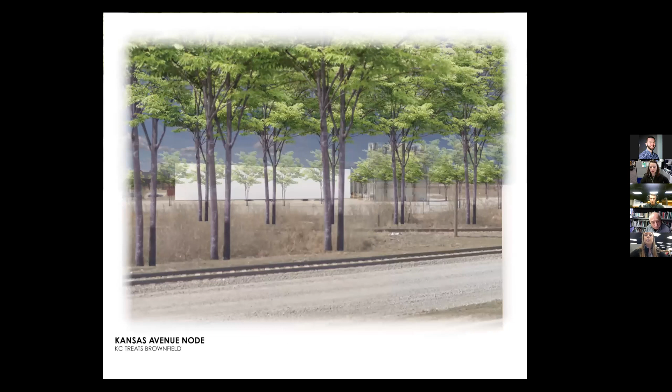Next we'll focus on Kansas Avenue and our proposals for improving the public realm along this road. This aerial photograph shows the amount of underutilized space right along the street. Most parcels either have large parking lots or lawn space that contribute to the lack of street definition in this area.

Here are some sections and photographs showing the current conditions of Kansas Avenue and the lack of buildings along the street.

This is our plan for new development along Kansas Avenue, with the purple buildings being our proposed infill buildings. This axon shows how our proposed park space can be an asset for local residents.

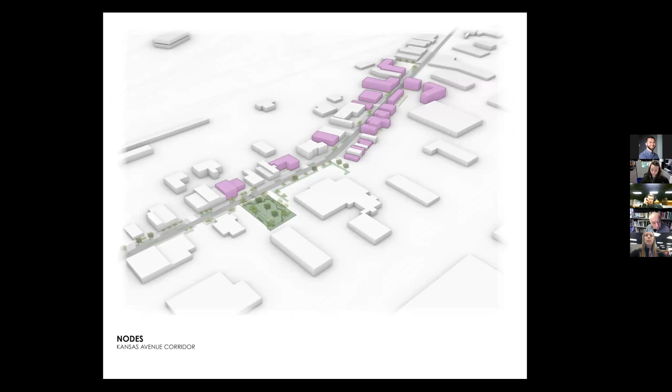Next, we'll show some sections of that park and some of the green infrastructure we're proposing along the street to provide shade.

We're also proposing to add bioswales and rain gardens to help contain and clean rainwater, letting it dissipate into the ground instead of the sewer system. Lastly, this next rendering shows what our green infrastructure along Kansas Avenue will look like.

Next we're going to move into the 7th Street node. At the south end of 7th Street lies the largest green space within our site. It contains over 70 acres of undeveloped land, including 15 acres of dense tree canopy. Western views look out over the river bend and eastern views show downtown KCMO.

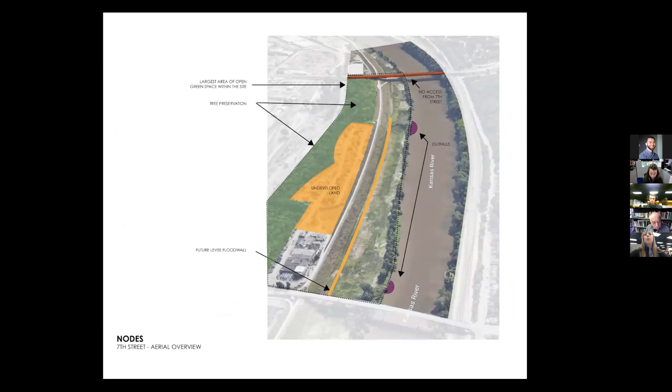We recommend that this land becomes a community green space and residential area. The creation of a park and residential area would protect the area from the encroaching industrial zone, establish a connection to the riverfront for the community of Armourdale, and provide greater tax revenue for the city. Flooding and heat and pollutants from the nearby industry can be improved by the thoughtful use of the land and the expansion of green infrastructure to 7th Street.

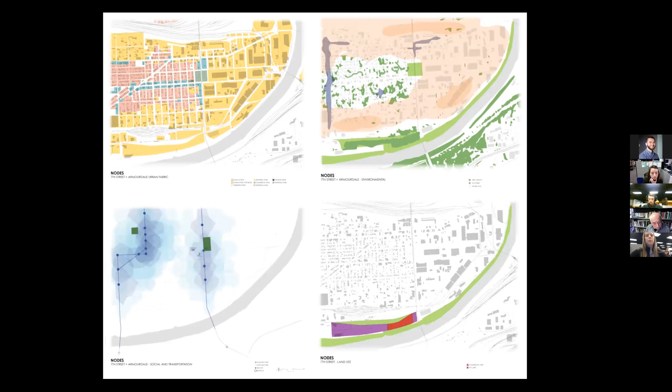Looking further into social opportunities and needs in the site, there are bus routes and bike paths that already run past the site and a new levee trail for pedestrians and cyclists planned for the area. A nearby park, community center, and hall host community events. The new park could provide an additional larger gathering space for the community. There are relatively few landowners, and one of these is Kansas City, Kansas.

Looking at the existing conditions of Armourdale, industry has been the most notable presence. Pedestrian walkways and public spaces do exist, but they are overpowered by car traffic. Looking more specifically around the 7th Street Bridge, forested areas as well as unused open green space dominate the river's edge underneath and around the bridge. Rail lines are present between where the 7th Street Bridge starts and the top of the levee.

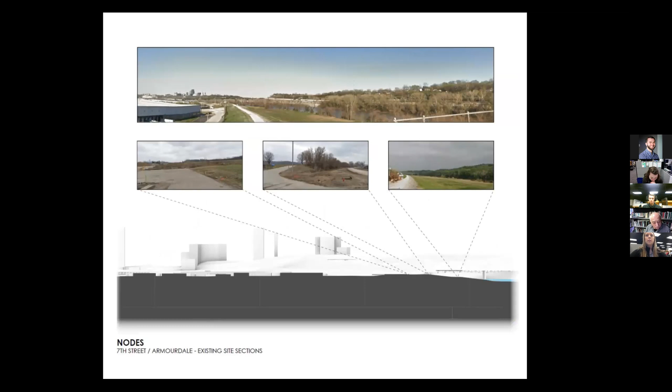Going back to our area's concept, we see the Riverfront Park as a major hub for the overall KCDC river plan and a starting point for the river trail. The two destinations of the Kansas Avenue node and the 7th Street Park node create an axis at the Kansas Avenue and 7th Street intersection. We recommend developing this intersection into an arrival point for the neighborhood and developing 7th Street into a mixed use and pedestrian corridor similar to our plans for Kansas Avenue.

We started the process of evaluating the best use of infill and form-based code and determining a pedestrian access point for the park via the 7th Street Viaduct. A main priority for this park is tree preservation at the north end of the site, which will assist in maintaining the naturality of the site, as well as reduce noise and air pollution coming from the industrial buildings beyond. The site is then further divided into two primary functions: housing complexes on the west end and recreation on the east.

The western side of the site was proposed for residential because of its access to 12th Street and the levee wall that will run through the middle of this area. To work with the levee wall rather than against it, housing can rise above the wall while parking remains tucked behind the wall. To encourage a river-oriented presence along the shoreline, terracing extends outward from the wall down to the river edge and is met by a boardwalk that moves above the water's surface. Toward the center of the site, the shoreline is developed outward to push the outfall away from the pedestrian trails and allow for remediation of the current eroded landscape.

The eastern side begins to take shape as a recreational zone and public amenity. Sports fields, a rec center, and a kayak rental shop encourage physical fitness and community interaction, as well as create a destination point that engages the river. These two sections begin to address the differing conditions of the two functions, as well as allude to homogeneity with the interplay of terraces for seating in the bottom section and terraces for sport courts in the upper section.

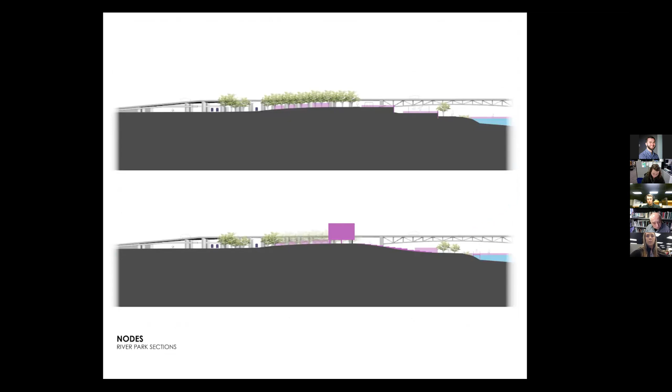But the overarching question was, how do we get to this park? There's an access road for the industrial buildings and several rail lines that need to be crossed. This is where we address the underside of the 7th Street Viaduct. This previously unused space becomes a key component to our design intentions.

A pedestrian trail will ramp along the western side of the vehicle bridge, and rather than mimicking the path of the traffic, the pedestrian bridge, now elevated, will cross underneath the viaduct and move south between the viaduct structures until all the rail lines are crossed.

Then a spiral ramp descends to ground level and allows users to continue the path under the viaduct to engage with booths intended for weekly farmers markets, community festivals, and events similar to First Fridays here in Kansas City, Missouri. A little further south, users are met with a pier that stretches into the river and doubles as a boat dock for access to the park for users of the Kansas River.

This section details the intention for the pedestrian bridge and the ramp that will descend to the booths. The pedestrian bridge reaches its maximum height at the top of the spiral ramp, where a view to downtown KC will be a stark contrast to the previous trail that traveled under the viaduct and above the rail lines.

Overall, this park is intended as an amenity for the community and neighborhood of Armourdale, to work with the industrial nature of the area rather than the segmentation they currently experience. We intend to create opportunities for interaction with the river that the neighborhood does not currently have, to encourage users to recreate both on land and on water, and to provide a destination that combines infrastructure and nature.

The 7th Street plan preserves a large, relatively untouched park space, creates a major riverfront connection and starting point for the riverfront trail, and creates a defined edge for the residential area.

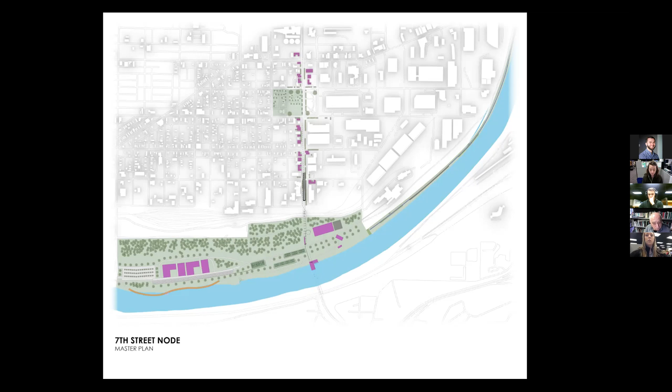Our key takeaways are that the area is currently dominated by industrial buildings, but we seek to find a balance between this zoning, new mixed-use developments, and the naturality that currently exists at the riverfront. The area is to serve as an amenity for Armourdale and connect them with the rest of the city. Finally, the riverfront strategies we have proposed will become a destination that encourages social engagement and recreation.

And I believe this will be our final Q&A that we would like to open up. Great job, Michaela. You caught us all up, we're a bit delayed in the presentation, so we have 10 minutes left for discussion. I'm pretty good at zooming through.

So I hope we still have an audience present. We invite you to respond to this, but also feel free to think about the relationship between this and the I-70 area. Hopefully we can open it to more comprehensive discussion if you choose to do so, so we can have some feedback and input and takeaways that we can think further about the issues and choice of areas we are trying to look into and propose for catalytic development.